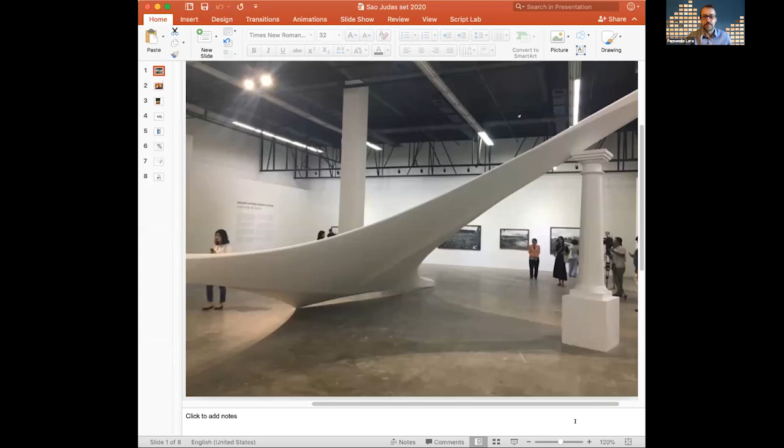I don't know when we started this partnership, I'm lost in time. I try to remember, but I know it was almost a decade ago. There was an opportunity in 2014, I believe, to apply to a grant by FAPESP and the University of Texas, a research initiative between the two institutions. We got the grant and did a number of initiatives together.

I will show you some here. We did a seminar in Austin, in which people from São Paulo came. We published a book that summarizes the whole work of the studio we did. We were at Itaim Paulista in 2015, I believe, or 2016 -- I think 2015. That's when we did the 2 parallel studios, and the book came out in 2016. But let me put those things a little bit in perspective before I talk about the Itaim Paulista work itself.

This is a perspective on Itaim Paulista based on my current scholarship. This is a work by a Brazilian artist called Laís Myrrha. She has an installation portfolio, several installations in which she develops a very powerful critique of architecture, especially a very powerful critique of modern architecture. I consider myself a scholar of modern architecture, and I see her critique as a very important new component for us to discuss.

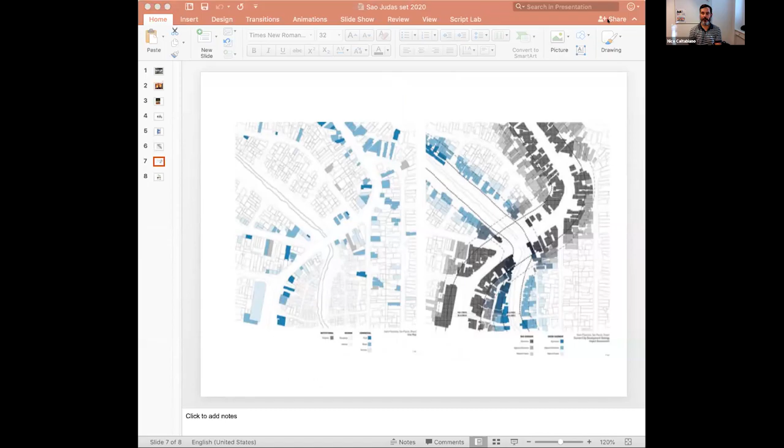Great, thanks very much, Fernando. It was really nice to hear of the experience and the partnership that you developed with São Judas over the years.

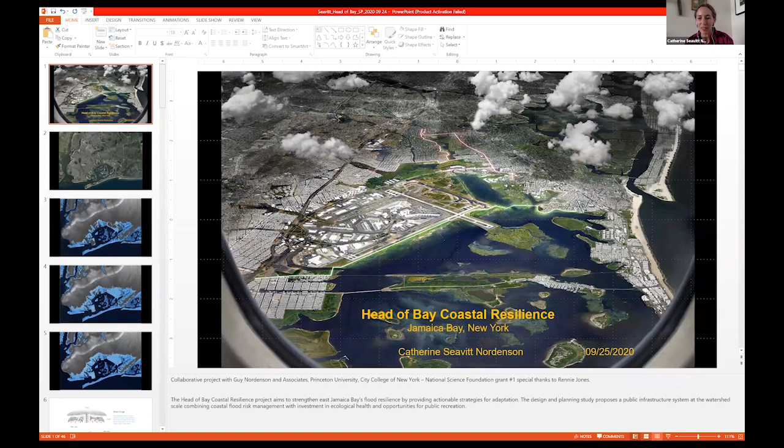Let me try to bring this up to full screen. This may be something anyone who's ever been to New York will know quite well. I'm going to speak a little bit about a research project that we've done with funding from the National Science Foundation, a federal agency, in partnership with my university, City College of New York, and Princeton University. I'd like to also acknowledge my husband and partner in all things, Guy Nordenson, and Rennie Jones, who worked together with us on this project for the head of the bay.

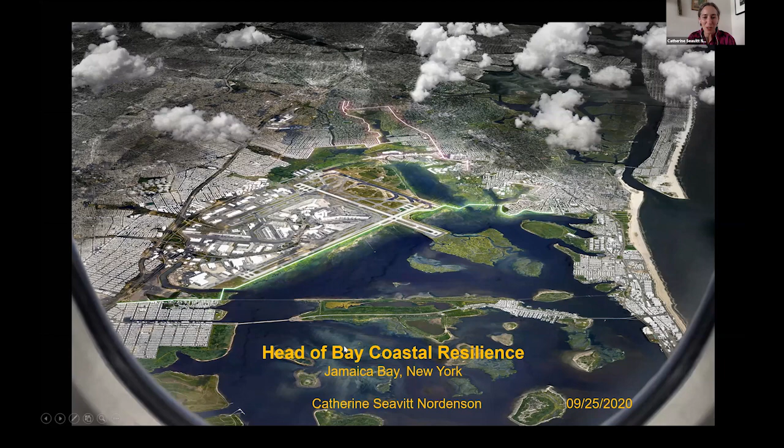I mentioned you may know this area because here is JFK Airport, so whenever we get our passports back, you may be flying in. This is a top-down view of the boroughs of New York. You can see Manhattan here, I'm sitting right around here. Very far to our southeast is this large coastal embayment called Jamaica Bay. The airport, as you can see, is here. This drawing essentially gives you the watershed.

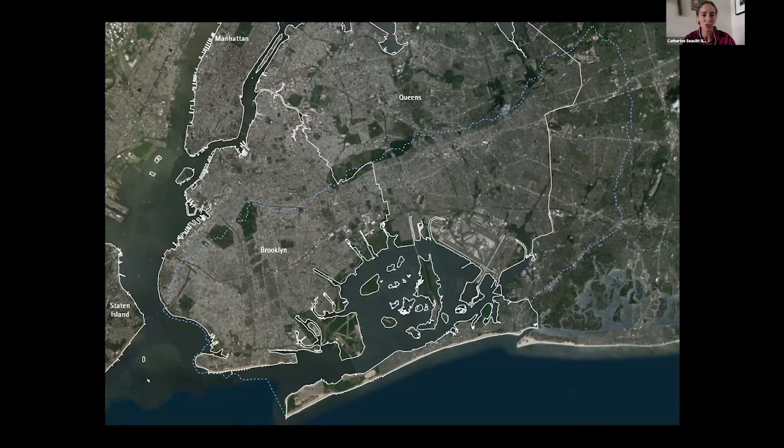So what I'm looking at today, and I think it's quite a nice conversation to have with Anita and Fernando, is the role of landscape and landscape architecture in terms of planning and thinking about resilience as the climate changes in this great emergency in which we find ourselves.

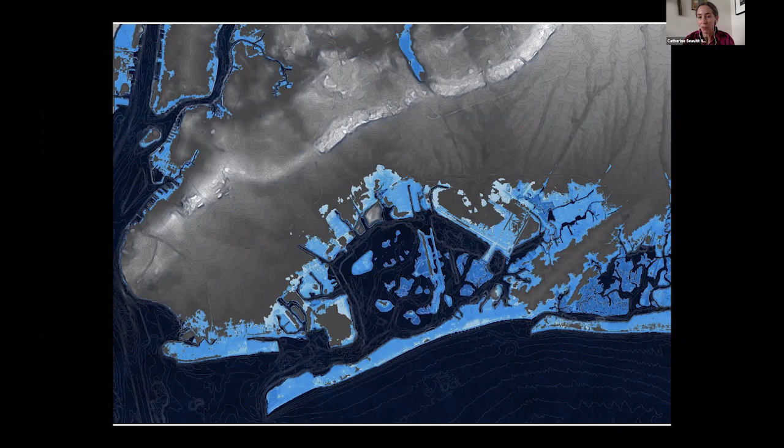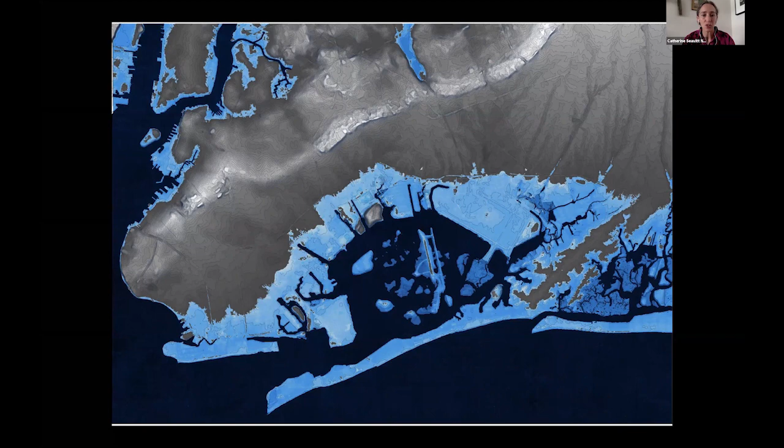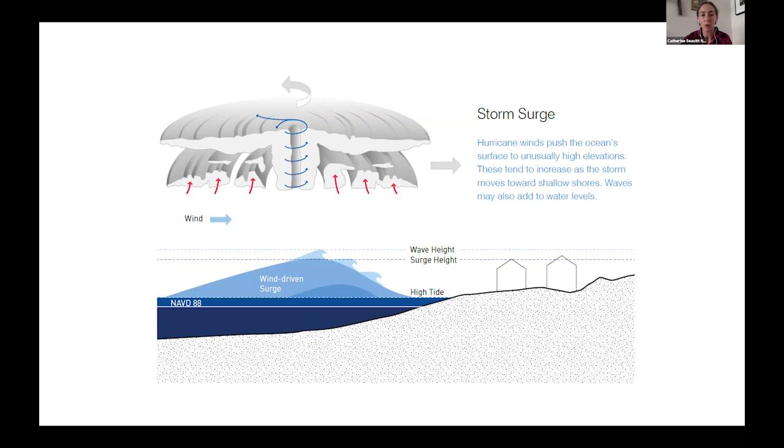This is looking at a few images of flood impact on that bay. You can see the coastal embayment here right at the Atlantic is heavily impacted by storm surge and flooding. This is looking at incremental flooding over time, as surges may occur, going up to a 20-foot surge elevation, beyond what we saw with Sandy. We have multiple forces impacting the bay. One is storm surge, which we know very well from our experience with Hurricane Sandy in 2012, where you get these incredible surges of water that are very, very high, and the flood impacts are great.

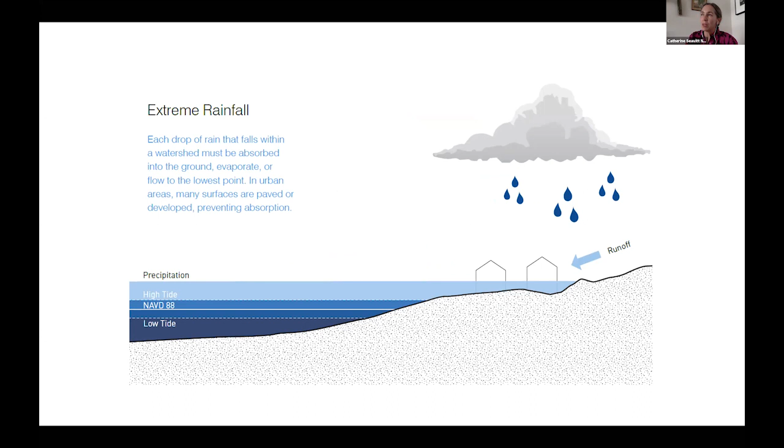We also have something coming not just from the ocean, but from the sky. We're getting increases in inundation from multiple aspects of the environment—from the atmosphere with extreme rainfall. This is something we're experiencing much more with the climate transformation, with a much hotter and wetter climate here in New York, and of course everywhere. You have the same issues, I believe, in Sao Paulo with the increased rainfall.

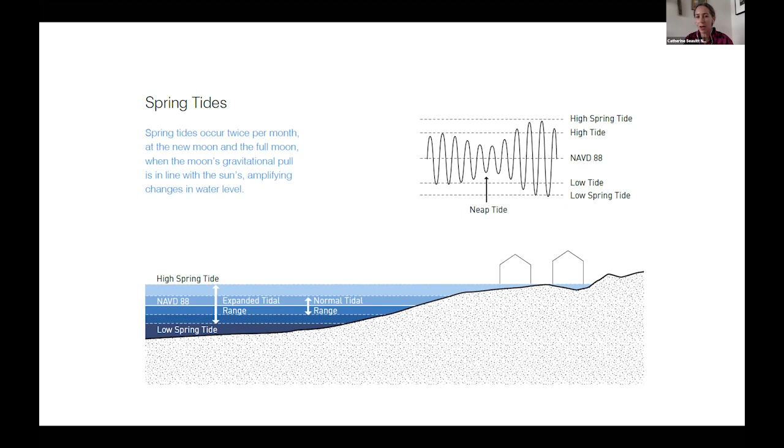Spring tide is another sort of daily insidious issue, where we have this twice-daily tidal inundation along the coasts. But we also have these very extreme spring tides, which occur every month in concert with the moon's rise and its pull. That high tide level is getting higher and higher, to the point where neighborhoods such as Meadowmere, at the northeast corner of Jamaica Bay's embayment, have a range of watery conditions like this.

We actually argue that it's much more complex than that. We have to think not only about keeping the ocean at bay, but also about the rainfall coming from above, from that vast watershed. And we can't forget that, like most cities, our planning has been one of erasure in many ways—not just of cultures and underrepresented peoples, but certainly of the environment itself, and the marshes in our condition here at Jamaica Bay, which were so extensive.

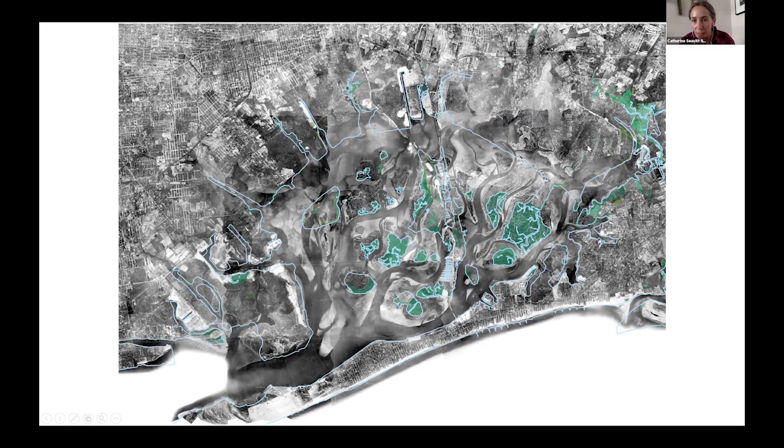What you see here in green is the marshland that existed in the late 19th century, overlaid with the streets and urbanization on that footprint over time. This aerial map is from 1924, around the beginnings of the great urbanization expansion of New York City, with the overlay of those marshes, and the blue gives you the current-day footprint. You can see what JFK Airport used to look like in this corner of the screen. This is incremental change over the last 100 to 120 years, from what was once a very robust marsh platform that absorbed water and worked with the ebbs and flows of the tides, to how it was slowly, and then rapidly between the 20s and 50s, urbanized and filled—transforming one ecosystem into a very different one, an urban ecosystem of hardscape.

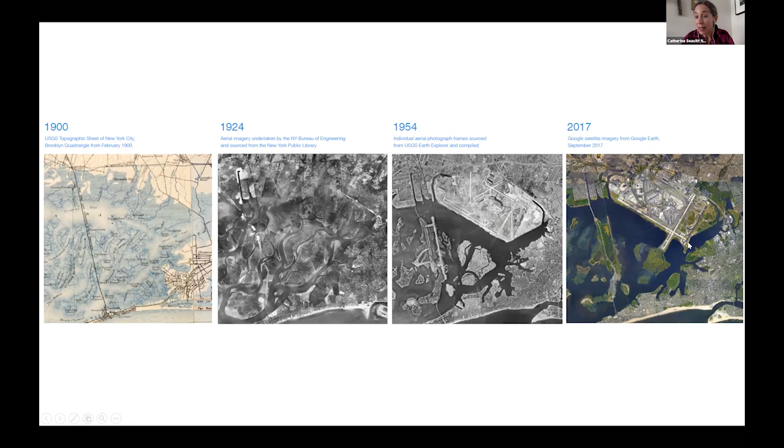The site we're looking at in this research project was the back part of the area around Jamaica Bay's JFK Airport. This is called Head of Bay—it's actually the highest elevation. Much of the watershed delivers water from this tributary, which creates this bay called the Head of Bay, and then flows outward to the ocean along that area. You can see it in this old map here, prior to the airport's construction.

Here we see this radical transformation of fill with the construction of the airport. It's the big elephant in the bay—the biggest concern. It's managed by the Port Authority of New York and New Jersey, and it's the economic engine of the region, if not the nation. It's the busiest international airport in the US.

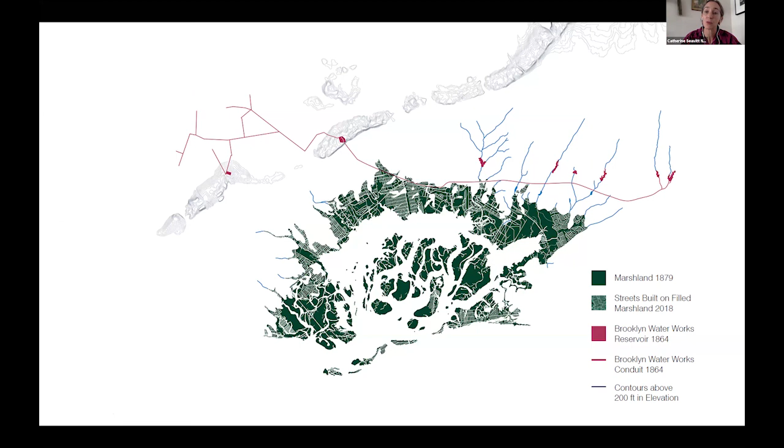So how do we reconcile the need for protection with the need for expansion and support of these marsh ecosystems, which we now know to be so important in mitigating the impacts of storm surge and flooding, as well as absorbing excess rainfall—yet doing that in a way where we start to think about how one can equitably begin releasing our urban footprint at the edge.

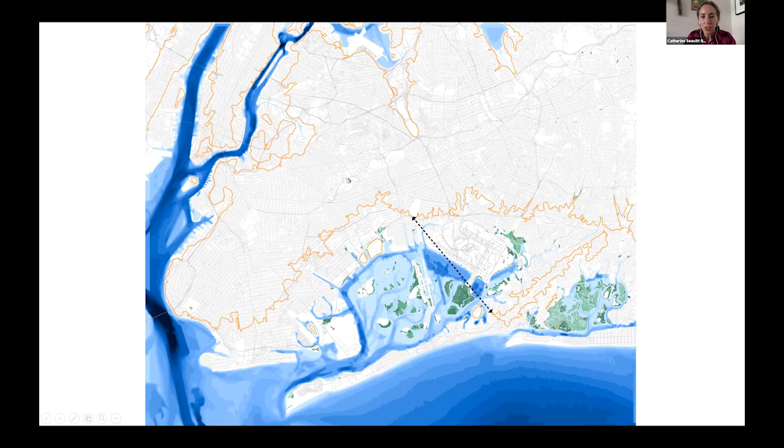So what we propose is essentially a kind of dual protection system, which allows a certain level of hard infrastructure, but really emphasizes the role and importance of softer landscape-driven infrastructures, including the wetland complex. The yellowish orange line here is a high line of protection that would, in an extreme storm surge produced by hurricane, protect this entire area in the hatched yellow color. The second, more everyday flooding protection is this pink line in the back.

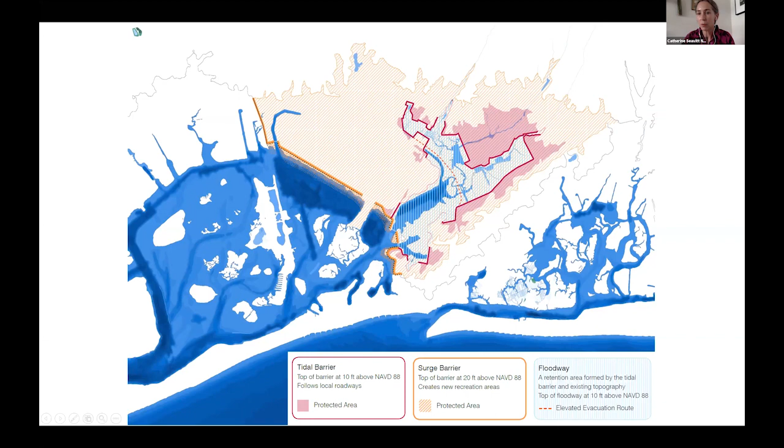Our notion is that we would keep this mostly open. It would only close at these points for a very high storm impact, but rather we would create a kind of elevated street, which would allow for some protection from everyday flooding, from increasing tidal surge, tidal inundation, the diurnal changes in water level, while still allowing the marsh to migrate upward, rainfall to flow through the bay and provide sediment to nourish the rest of the marshes within the bay, and allow for understanding this as a reservoir, a place to hold water over time.

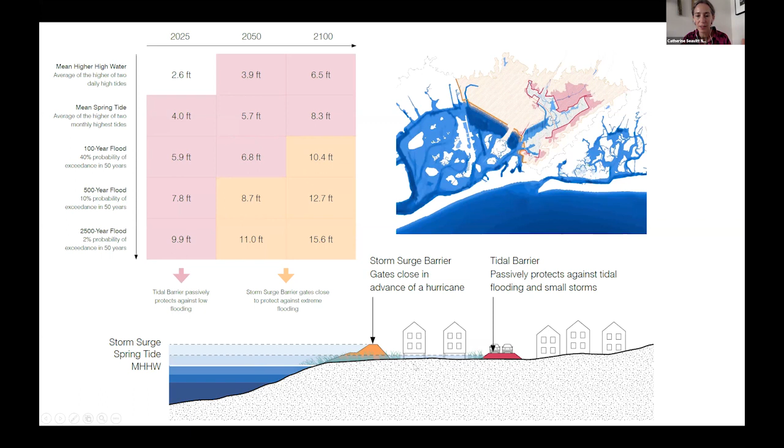This section gives you an idea of the higher outer barrier, which would generally be part of a gate system operated only in very extreme situations. But the tidal barrier raised street is something that actually allows one to understand where might things get wet. So even if one is in an area that's not behind that level, there's an awareness of where one is.

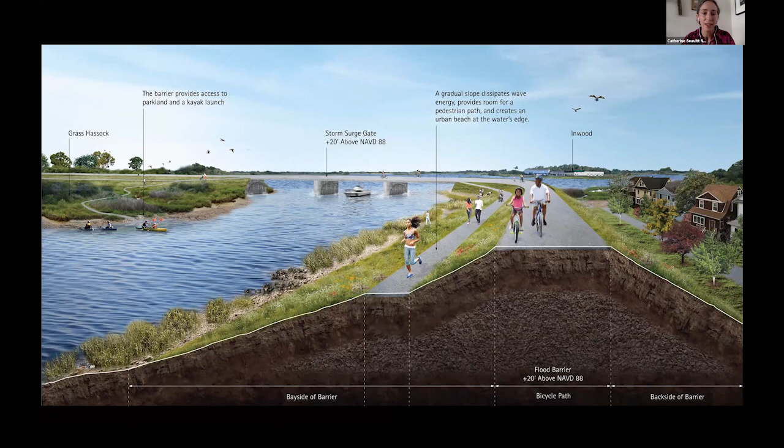Some of these images give you a sense of how we imagined this new infrastructure might actually be an amenity to the nearby communities. Here you're seeing the higher flood barrier could be transformed into a bike path, jogging path, a place for equitable recreation and providing new green space to an area which really needs it. We have some of the most marginalized New York communities living in that zone behind the airport.

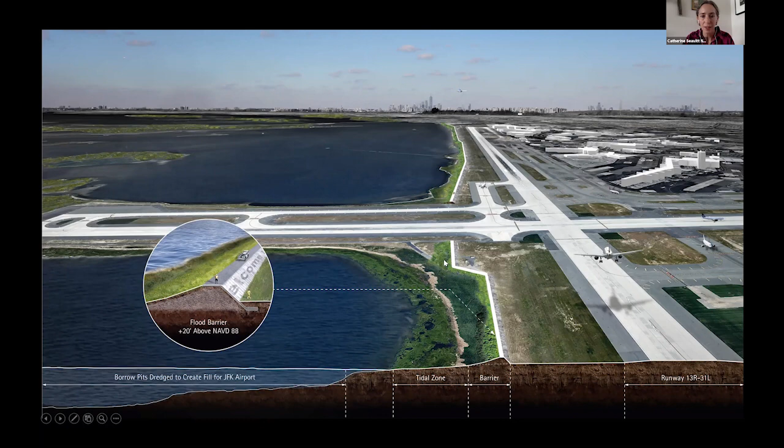This gives you a view of the berm at the front line of the airport and the closure that would occur across this one runway, which actually projects into the marsh, as well as at the opening to the head of bay. And here we see an image of that raised street, where one side is not going to be impacted by the daily tidal increases, but this side, on the bay side or water side of the raised street, would need to adapt accordingly.

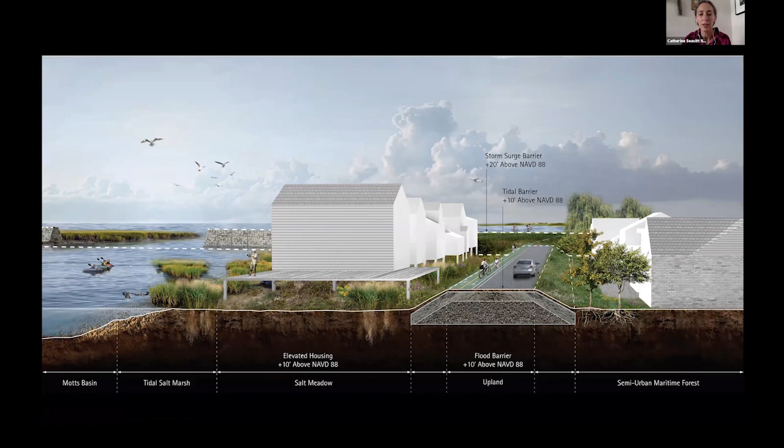So one thing that we're really thinking about very actively is how to think about actionable progress and adaptation in the urban realm and in the planning realm, acknowledging the fact that places will be wet and people will be at risk.

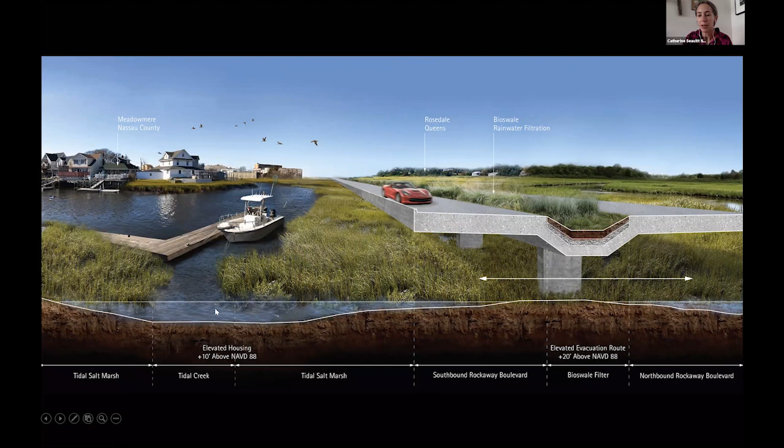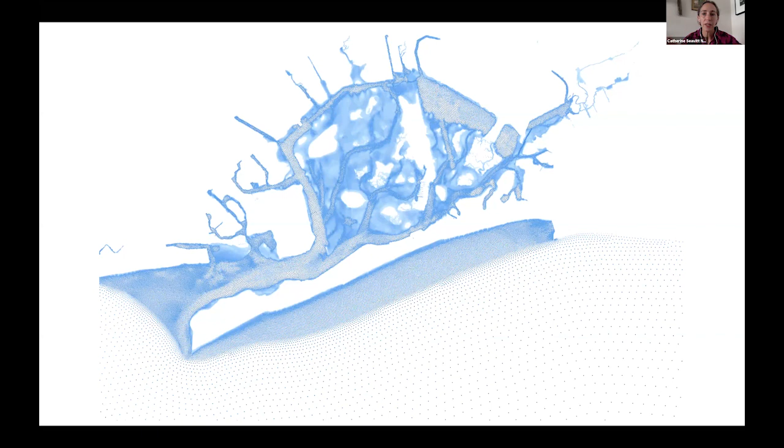I'll share a little bit about some of the technical work that we did with scientists at Princeton University, creating a mesh of the bay and then running hydrological models to actually test various projected storms over different conditions of sea level rise and storm intensity. That allowed us to create simulations about what would be the benefit of the proposal.

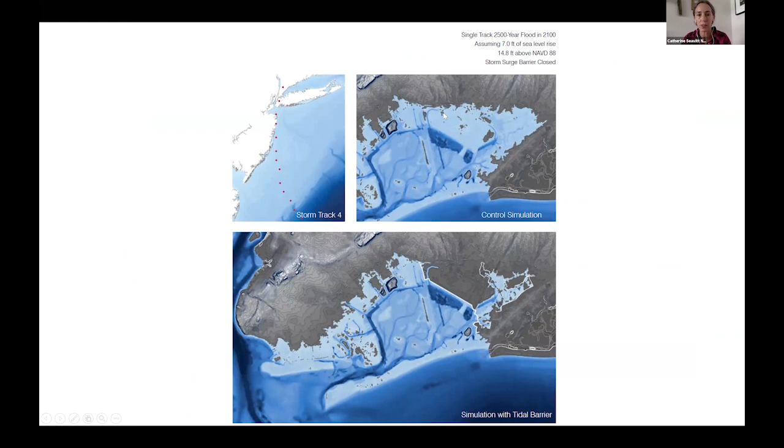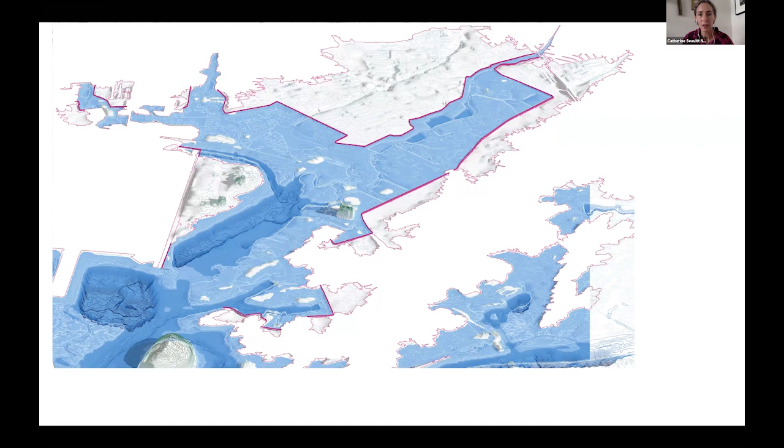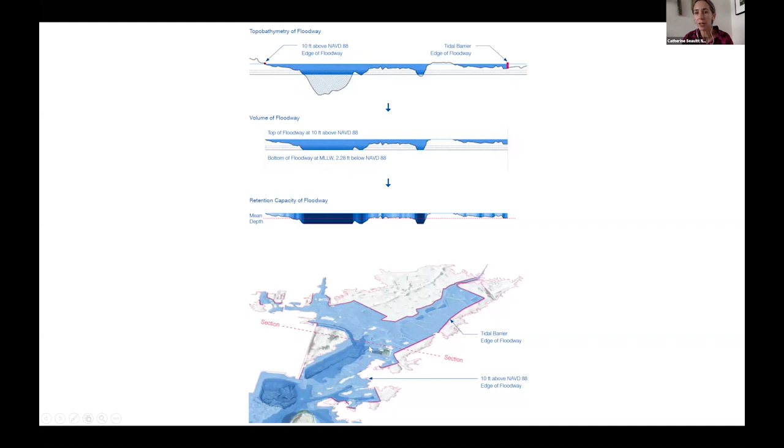So you can see the elevated street line, and everything within here could help augment and contain rainfall—these incredible storms that bring water from the atmosphere into the ground—collecting and slowly dispersing that water to the bay, and actually allowing for more sediment flow, which benefits the marsh ecology. These are a few sections through what we call the floodway, an area actually planned to hold water in the case of extreme rainfall.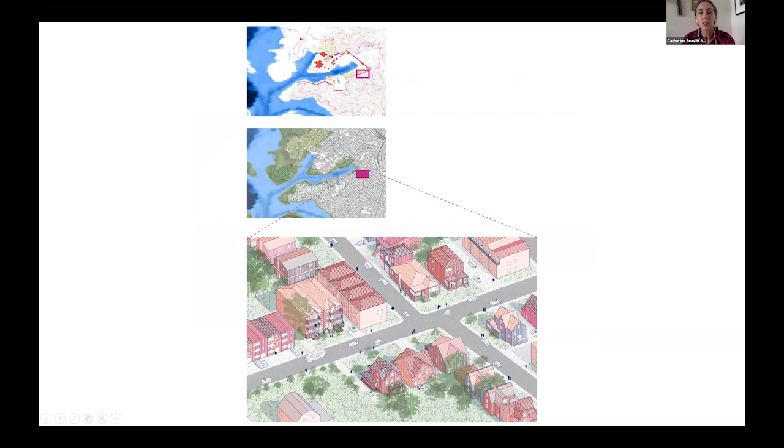The last thing I'll show of the project is a few images of how we might think about adapting architecture, residential and commercial, within the region. This is a little corner to the south of the airport, an area called Bayswater. We zoom into a little square here to show how over time neighborhoods and communities could start to adapt to increasing water levels, and that this project could be implemented slowly and gradually over time.

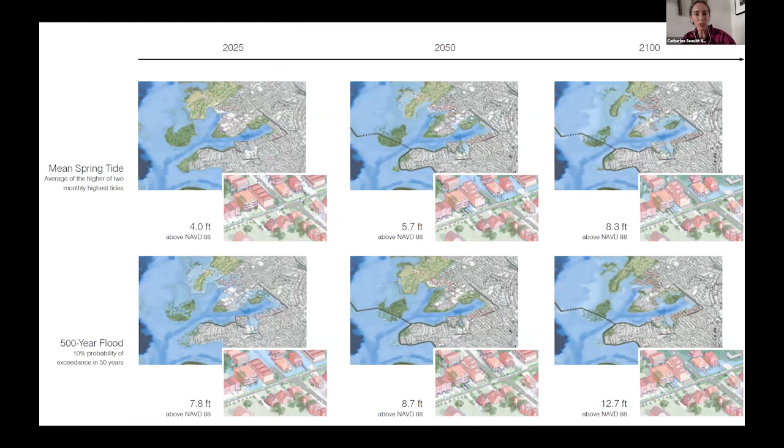And of course, over time, we're seeing sea level rise as well. So some of the strategies we're taking look at elevated tidal barriers for egress on certain larger boulevards. Houses which are in an inundation zone would be elevated.

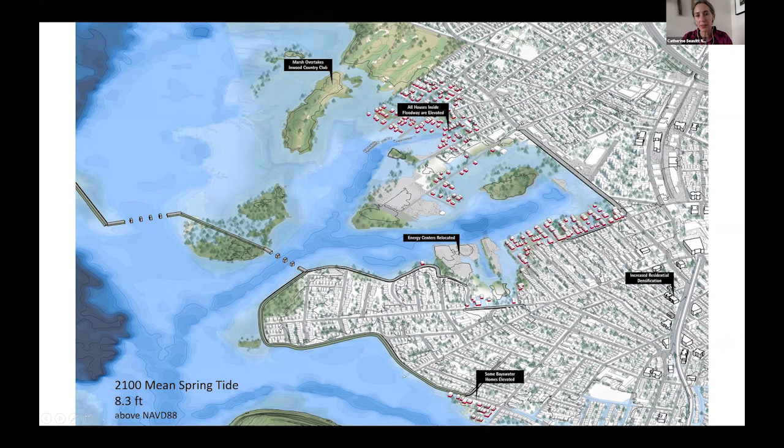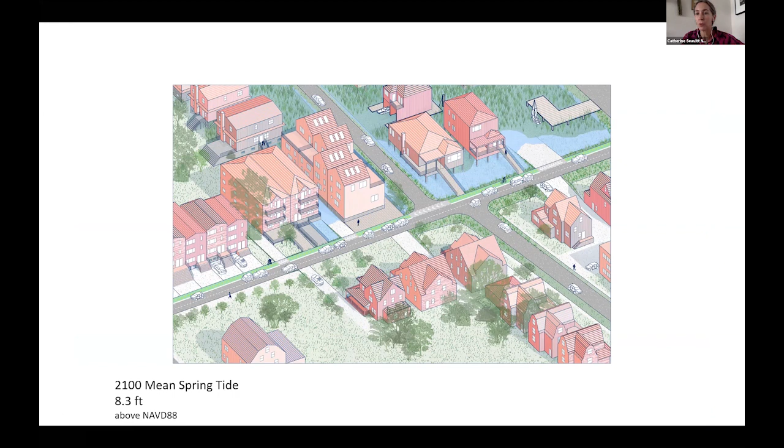And then we'd see more incremental changes over time as we increase the layers of protection. This brings us up to 2100, and then just a little zoom in at the neighborhood scale, showing how streets could be elevated, parts of houses and elements of public spaces, even housing for multiple families, could be flood-proofed in some ways—or wet flood-proofing, as it's called in planning departments now—and how we can continue to live within this coastal edge, but with an understanding that we truly need to adapt to these changing conditions.

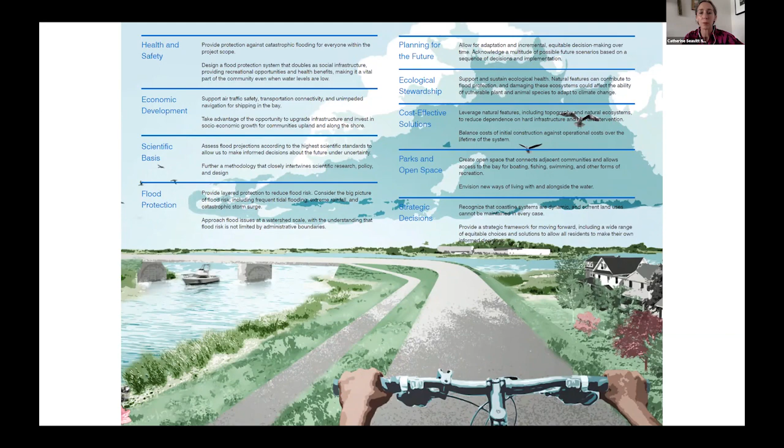So really, by leveraging existing topographies, we hope to reduce the ecological impacts, and indeed the overall cost of these protection and adaptation features, but at the same time really open a dialogue about who is included in this, how people might be moved from harm's way in these areas which are increasingly repetitively inundated, and how to make the most equitable choices at the municipal scale for making these changes. And that's it. Thank you so much.

Thank you very much, Catherine. It's really nice to see a different perspective from what we are perhaps used to, particularly in São Paulo, not being a coastal city, but with similar problems with flooding, right?

And just to remind everyone, although the Klimapolis laboratory started in São Paulo working with partners there, we do have partners in other areas of Brazil, particularly in the Northeast. Most of the metropolitan areas are coastal cities, and they have the same issue you experience there, and more. So it's important to have this perspective as well. We are planning to work with coastal cities as well. So thank you very much for your talk.

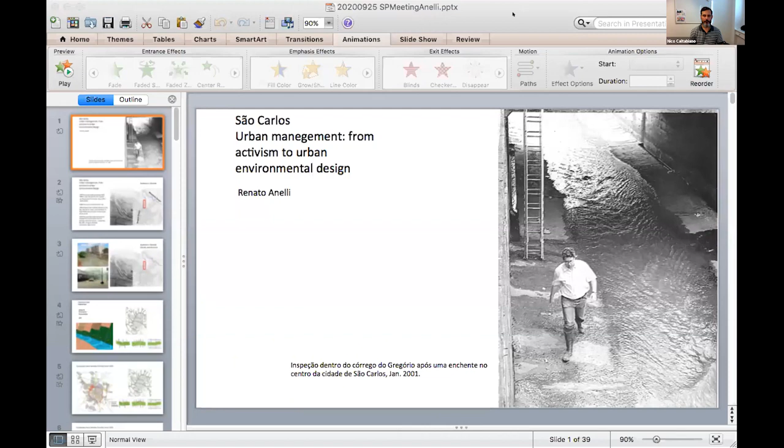So this is me, as you can see, a little bit younger, 20 years ago, supervising a channel in São Carlos the day after a flood in the business center.

Very interesting. I will talk about this experience, but from a specific point of view: how we moved from activism to this urban environmental design, and now back to activism, and how this role, this position, changed with time.

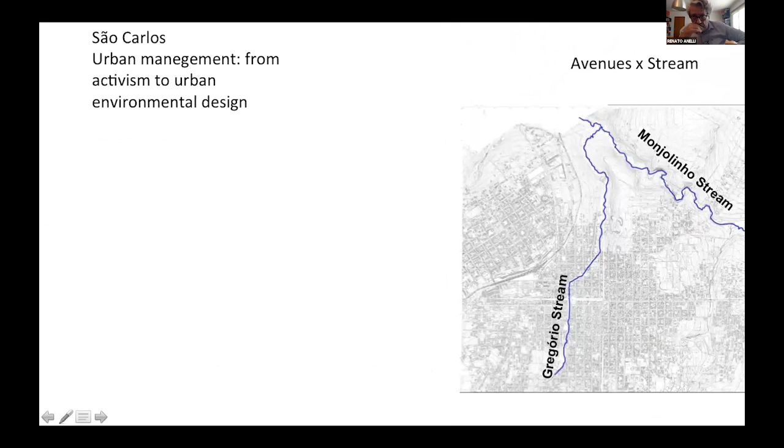So the problem is, in a city like São Carlos, this conflict between avenues and streams. As you can see in this survey from the 1970s, the original streams all had meanders, with this original track. In the 70s, they were channelized, straightened and channelized.

And this makes some problems for two aspects. One is the flooding and erosion, and the other is that this is against the environmental Brazilian law.

So in 1995, this NGO, Associação para Proteção Ambiental de São Carlos, sued the city for not respecting the permanent protection area in road projects. As you know, these areas mean 30 meters from the side banks of each river or channel.

In 2000, the court condemned the city to stop the works and ask for permission to continue the road project. At the same time, the Workers' Party won the election.

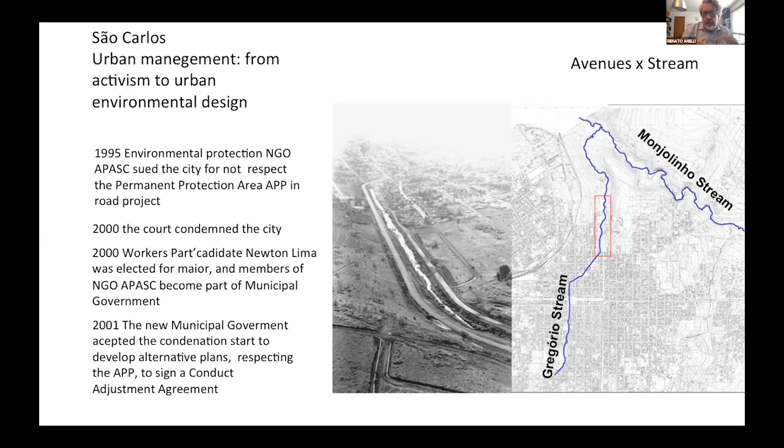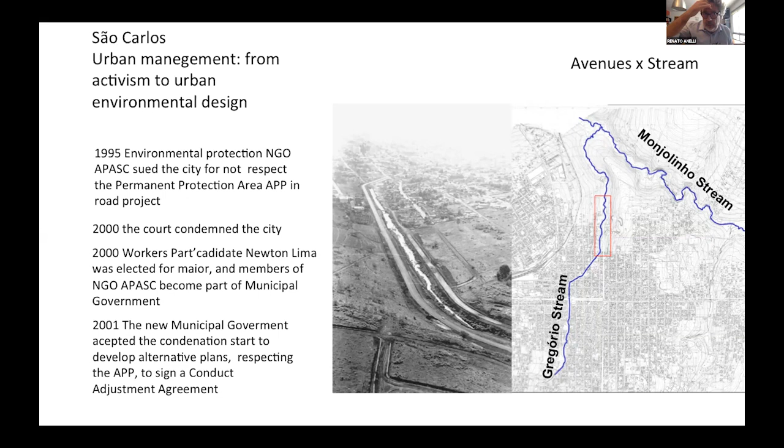That was actually signed 4 years later, but as it was in negotiation, each project that I will show you was approved by all the parts, the court and the public ministry.

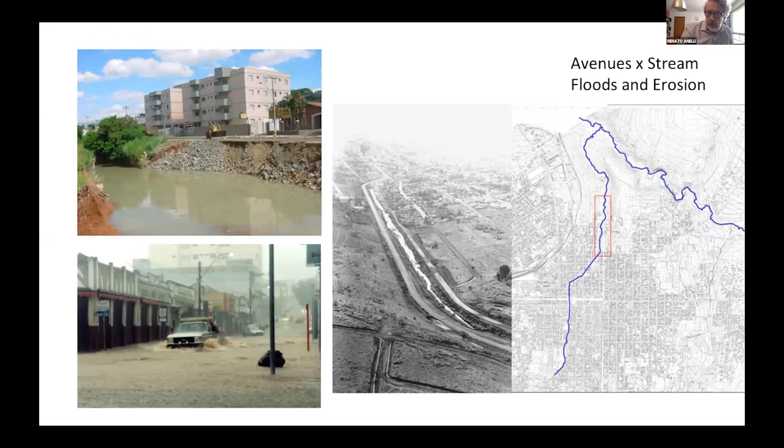So this is the effect of the flooding and erosion. And this is the area of permanent preservation, this distance that has to be preserved or renaturalized, revegetated - I don't know how to say it in English.

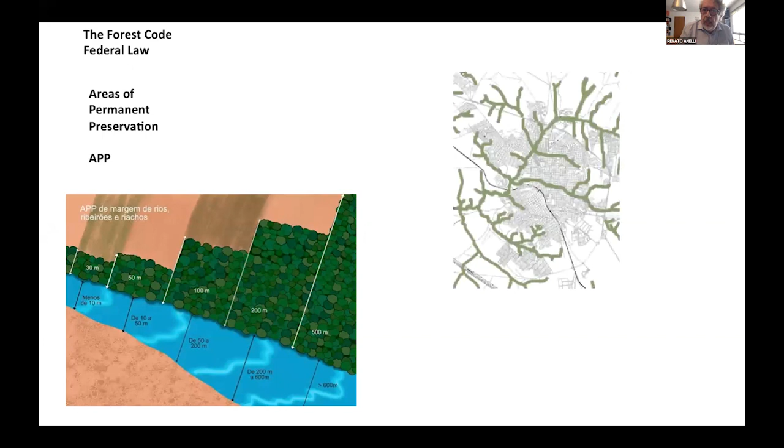The problem was that we have this network of creeks, small creeks, on the streets, on the territory. And this was an urban challenge, because how to deal with the continuity of the city and the renaturalization of this buffer of 30 meters each side of the creek.

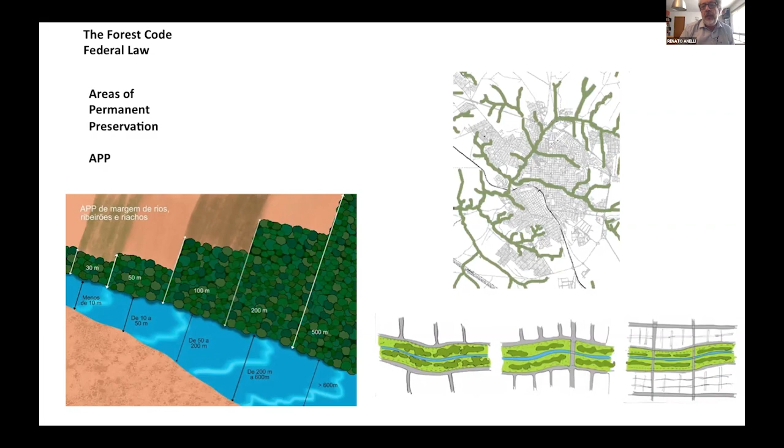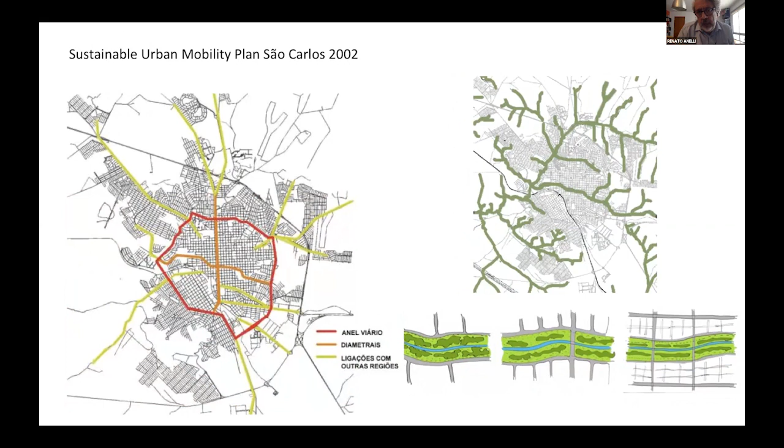So for us this was an urban problem. We started with the projects for the ring of avenues that was uncompleted, and we needed to design the new roads observing this distance, these buffers.

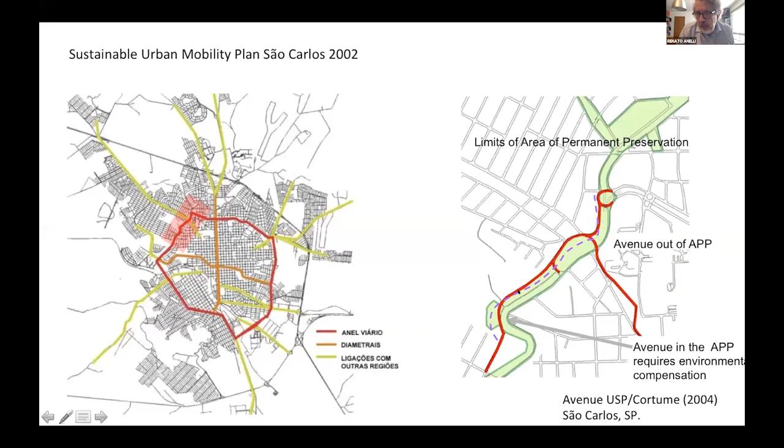The first one was that we started to look for space to keep distance from the water here, and this was with some compensations in other places. So this is the first one that was approved in 2004.

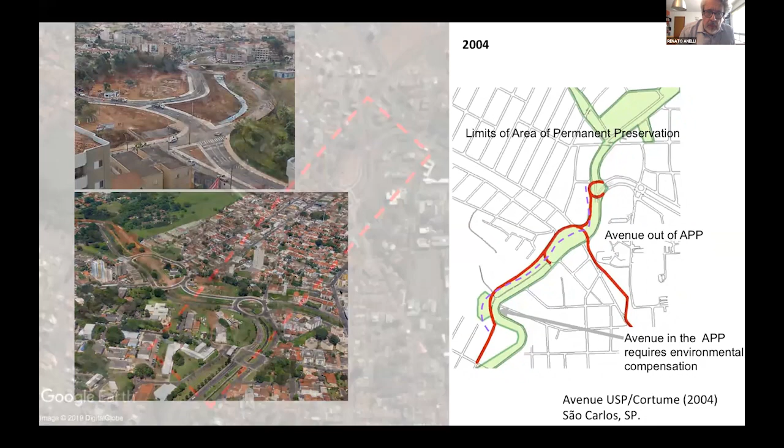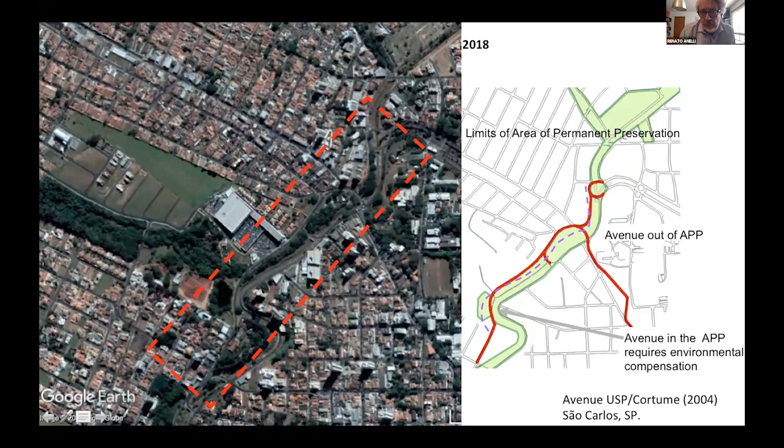Some years later, as you can see, there's strong vegetation now, all in this buffer zone. So this is a kind of linear park, but associated with the road system. This is how it is near our campus.

The second one was near downtown. This area was a place where there was a factory, a plant, demolished, and we needed to build this road again, so we opened the space for a green park, and here we worked.

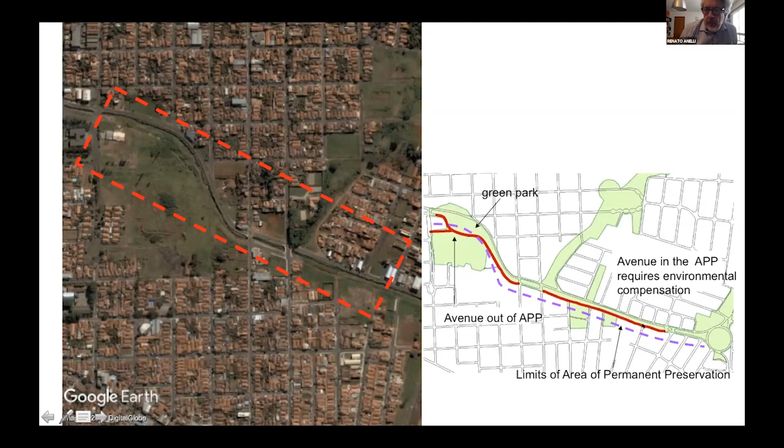It was impossible to take the distance from the water, from the banks. So we assigned some compensations in other places of the city. This is how it is now.

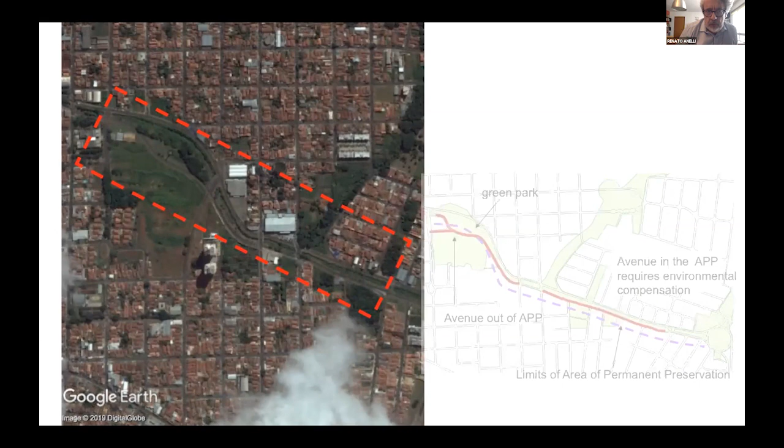See some pictures of this park here, 15 years later.

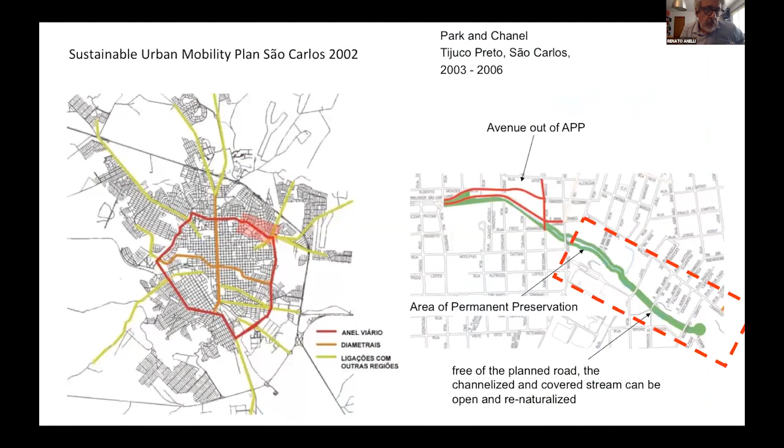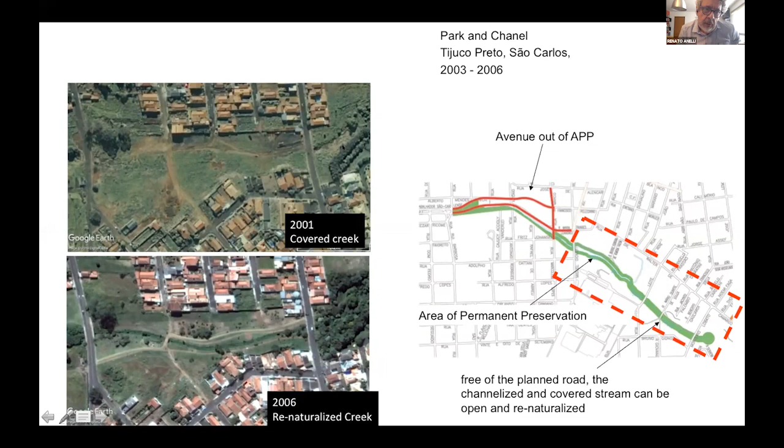Here is my favorite. This is where we decided not to build the road. It was already covering the creek with a concrete structure, and we proposed to remove it, building with some nature-based construction technologies.

In this case it's raw timber, raw logs of eucalyptus, with some protection. So this is when you remove the concrete canalization, the channel looks like this.

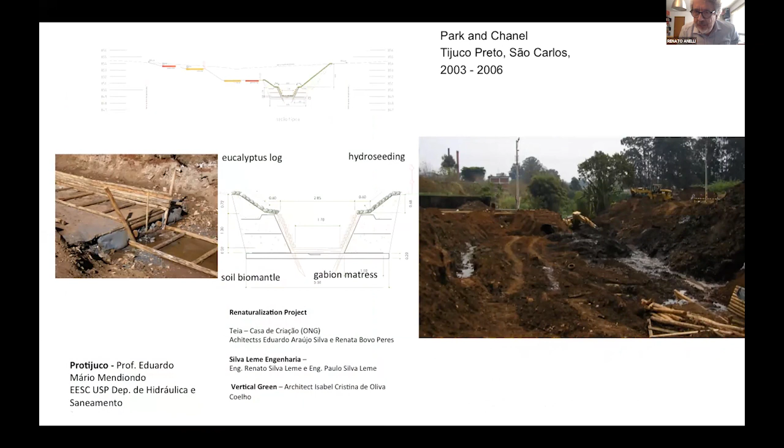So, some pictures of how it was during the construction and how it is some years later.

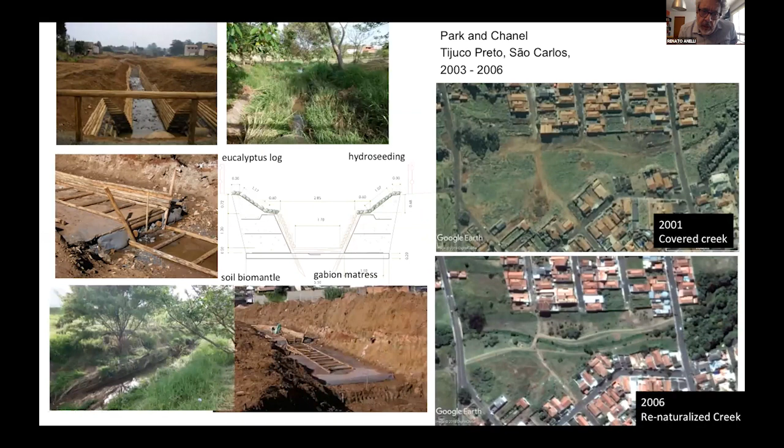People open gates on the backyards of their houses, because this was the back of the houses, just to go to the new park and to live in the park, and dwellers opening this new entrance for the new park here.

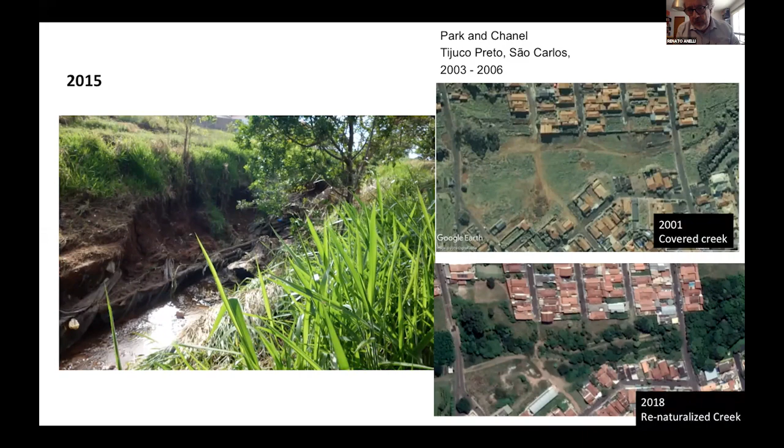And this is how it is, almost like that, with some erosions yet, but the plants, the vegetation can stabilize it after some time. So you have this situation sometimes, and it is surviving yet.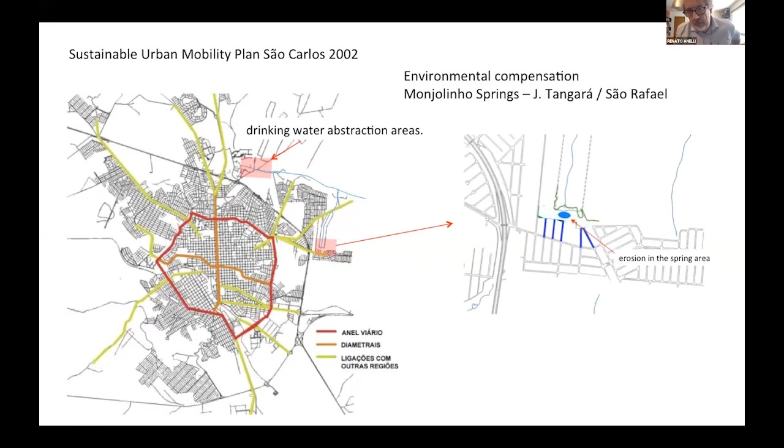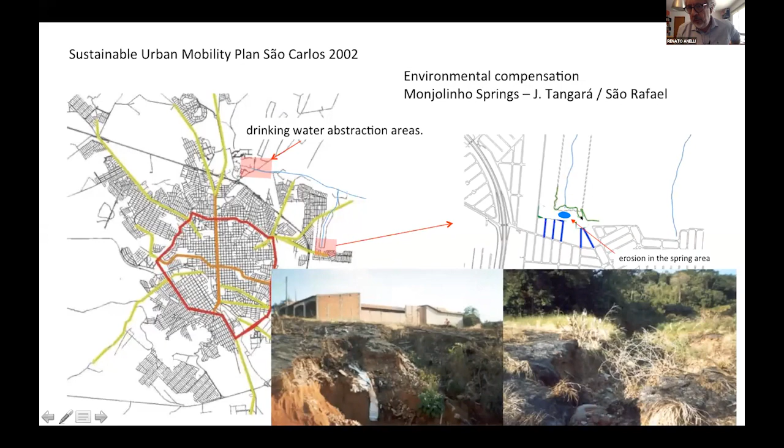This was near this settlement here, with a huge erosion, despite the fact that it is in the green area of this parcellement.

So the problem was we tried to make something more landscape, beautiful in the sense of landscape, but with retention. But it was impossible to develop this project because this was actually a rubble landfill underground, 5 meters high.

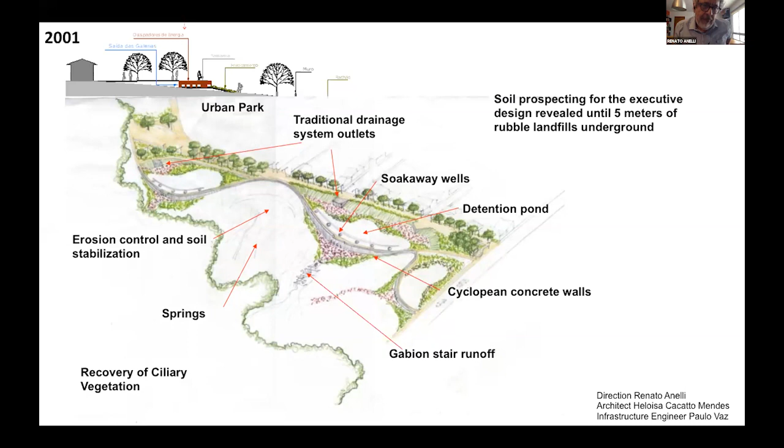So we developed another project with the concentration of the runoffs here, and stairs to take it down, with some green infrastructure to stabilize the banks.

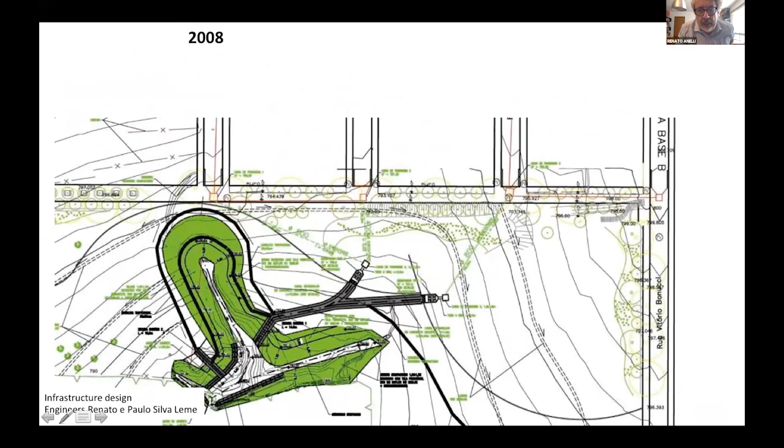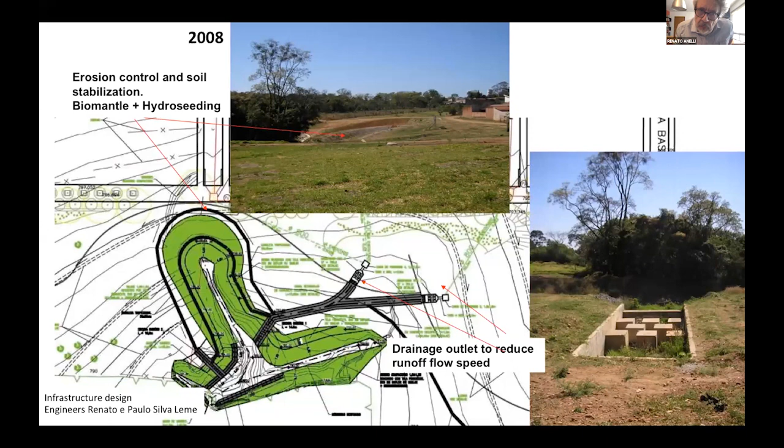So this is how it was soon after the implantation, the construction, using biomantle and hydroseeding. I was just in the inauguration. It's very interesting to say that soon after it was cleaned from the rubble landfill, all the surges come back, the springs come back. So the supply of water is a problem of the design of this kind of device.

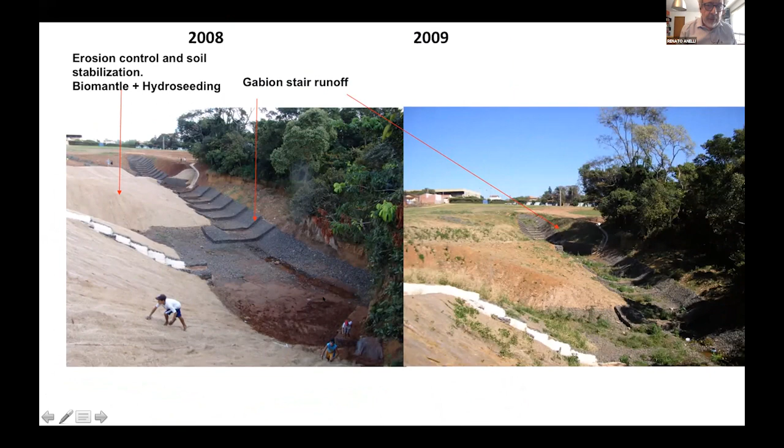So this is how it was soon after the construction here, and this is how it is now. This was in 2009. I don't have any recent aerial view, so this is how it is now in this point.

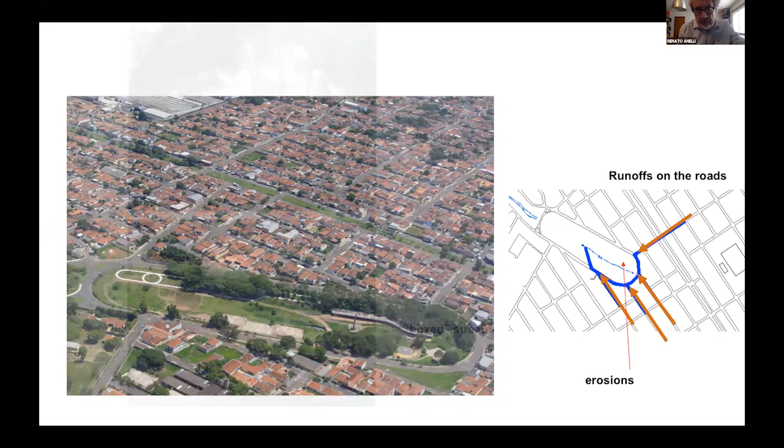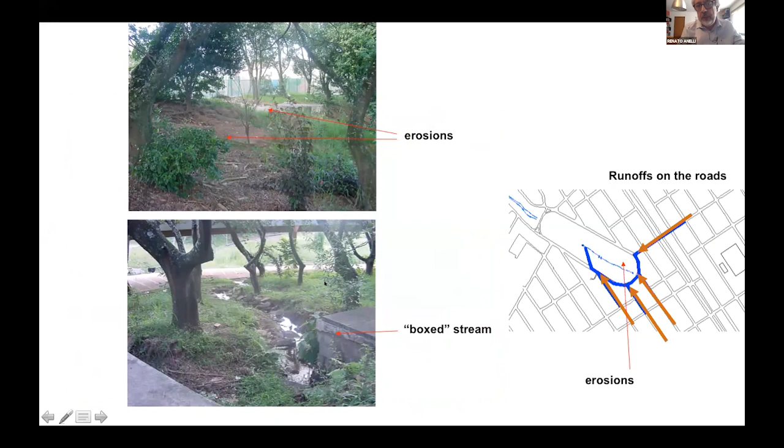And this is another case. It's just some kind of retention with low impact on the landscape that we did at this point. This was a park that was built in the 70s, but with problems of erosion from the runoff that came over the streets. And this is a boxed stream, a boxed spring actually, and erosion.

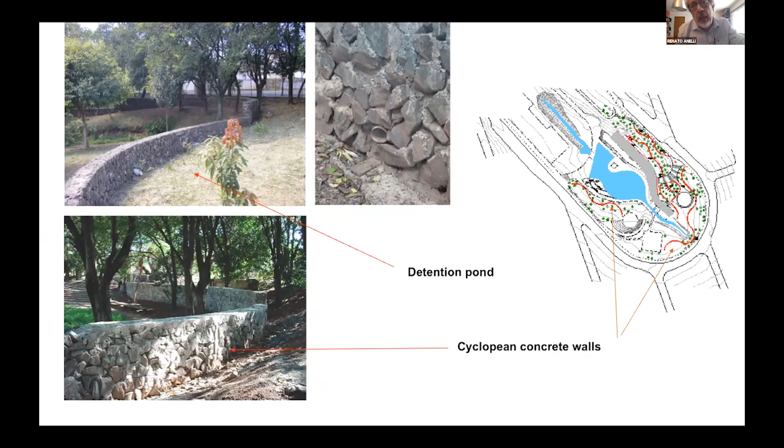So we developed this kind of barriers that make a kind of retention all over the site, and with this we reduce the speed of the water going down to the lake. This is a small pool actually, and we opened the springs, to make it visible for people to know that here is from where your water came.

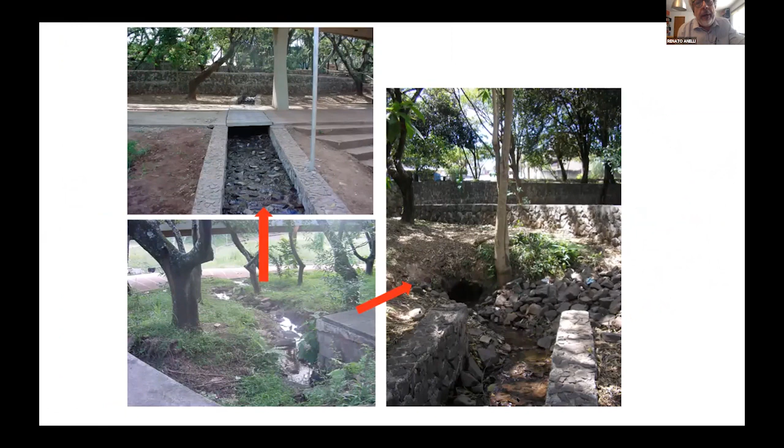So after 3 terms of the Worker Party in the city, the new municipal government abandoned the maintenance of these infrastructures, but that conduct adjustment agreement remains as a resistance piece for keeping the integrity of these previous works.

And on the other hand, these nature-based solutions are working quite well after these 15 years, keeping stable the banks of the creeks and sources, despite this lack of good maintenance. So in somehow this legal piece of the conduct adjustment agreement is very strong to stop any new project that proposes a road system again over this park.

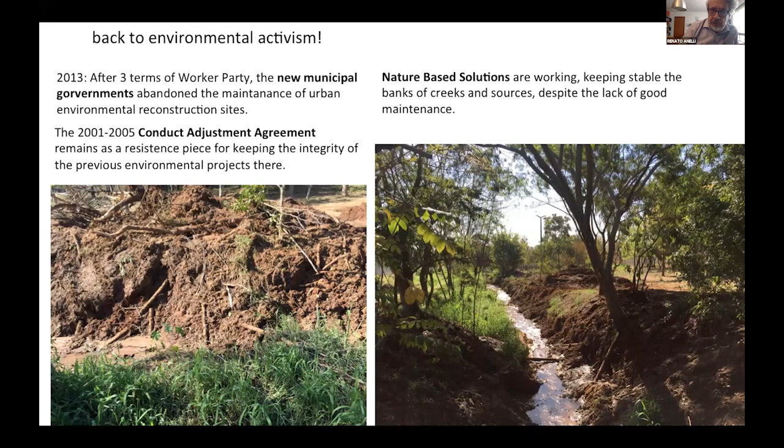So this is important. And also many of our former students became architects, officials in the city government. So they are still there, and they are defending these interventions from inside of the city government. After this, so we went from activism to the administration, and then back to activism.

And my question after that is, what's the role of the universities? I think now it is to propose experimental urban design and planning.

So that's why in 2014, we discovered the Itaim Paulista and the Lajeado stream as a problem, because it is still very close to this new bus rapid transit corridor that's proposed by the strategic master plan. So how to deal with this corridor, this road infrastructure for public transportation, public transit system?

How to deal with this with the renaturalization of this terrain, and make space to build some nature-based devices to avoid flooding that's affected very much this basin. Not only this basin, it is part of the Tietê basin, which is a huge problem for the city in big flooding.

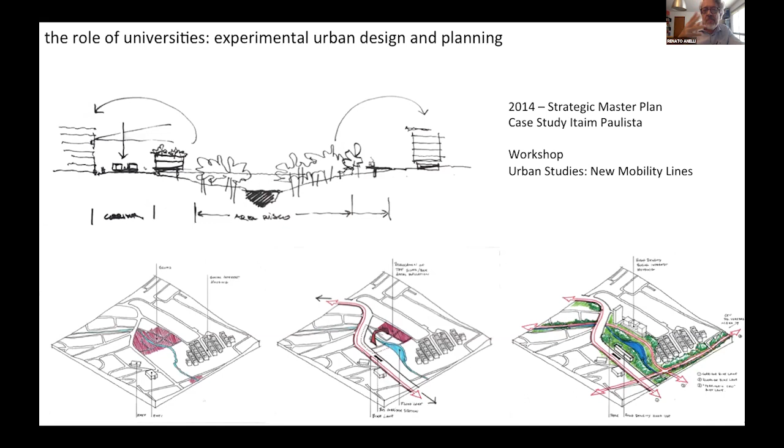And now I'm very happy to see, 5 years later, how this question became reality with your students, your architects, with all this cooperation with the district administration. So congratulations, that's it, people. Thank you for your attention, and I'm back for this conversation.